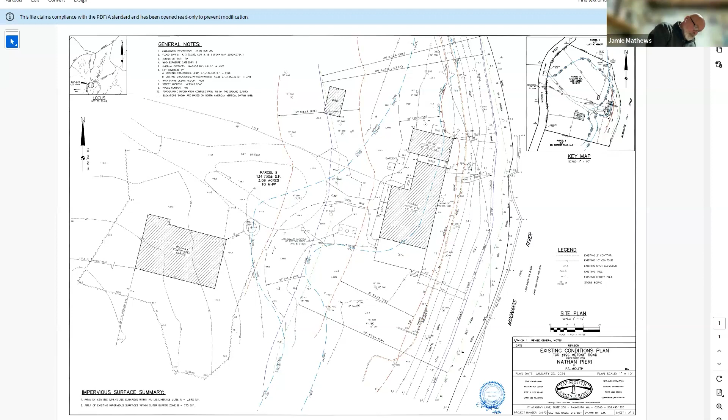Yes, sir. Before I start my presentation, I want to fess up to something. I was unable to get to the site to place a sign to help you find the site. I'm hoping you were able to find it. There was a street address at the driveway entrance and the name, and the last week got away from me and I never got out there to place a sign. Make a motion to deny. I'm kidding. We thank you. Forgive you this time, Mike. All right, thanks.

I'm sharing with you the existing conditions plan of the site. The property has water frontage on Moonakis River. The wetland resources of note include land containing shellfish, land under the ocean. There is a narrow band of salt marsh. There's a sloping landform that meets the definition of coastal bank. I've also highlighted spring tide and noted that as land subject to tidal action because it has associated with it a 100-foot no disturbance zone A. More on that in a minute. There's also an area of critical environmental concern that's flood zone elevation based, and it's elevation 10 on the maps in this location.

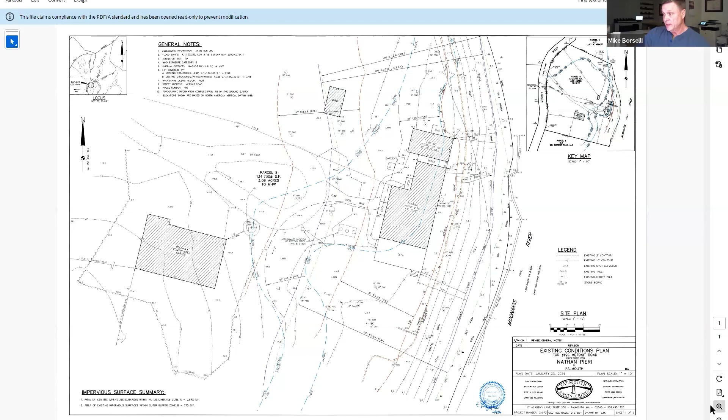The lot is fairly large in size. I'm going to zoom in on this map. The lot itself is 3 acres in size. It's heavily wooded with the exception of the driveway and portions of the site that have been previously developed. On the lot today, you would have seen an existing house. As you approach the house on the right, you would have found a recently constructed detached garage, which is outside your jurisdiction. And there's a shed also on the property. It has a teardrop driveway and some lawn areas.

The plan is to demolish portions of the house and renovate other portions of the house. In the staff report, the term raze, R-A-Z-E, is used, but this isn't a complete demolition. This is a partial demolition because some portions of the house are very old and special, and the client wants to keep those portions and demolish some of the newer sections, which were constructed in, I think, the late 90s.

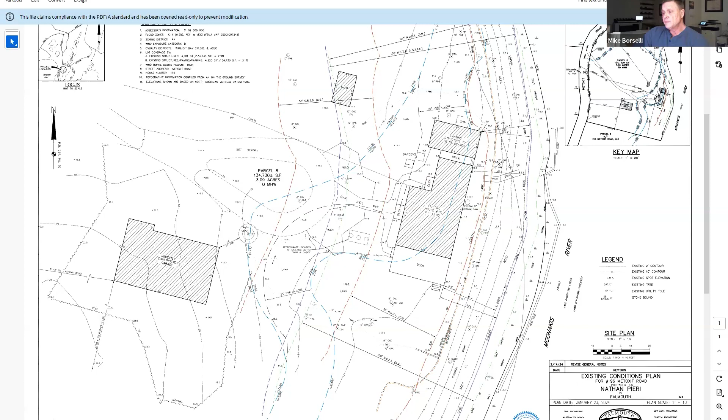I'm going to show you an exhibit that I can't take credit for. Mr. Pieri did this exhibit, and it outlines what I mean by not a full raze and reconstruct.

As this project progresses, the idea is to demolish 2 sections, shown in red boxes. That is the existing deck in this section of the house from 1999, which is going to be demolished.

This middle section in green is the original house, and that is going to be preserved, but it's going to be put on a new FEMA compliant foundation. And this section here is also going to be preserved.

But this section is going to be moved. It's going to be moved from this position over into a location here, which shows on my site plan, which I'll show you in a minute.

In order to put the new foundation on this project, that section is going to be moved. This will be demolished, and this will be demolished as step 1. Step 2 involves, after that section's moved, shifting the box over that they intend to preserve temporarily.

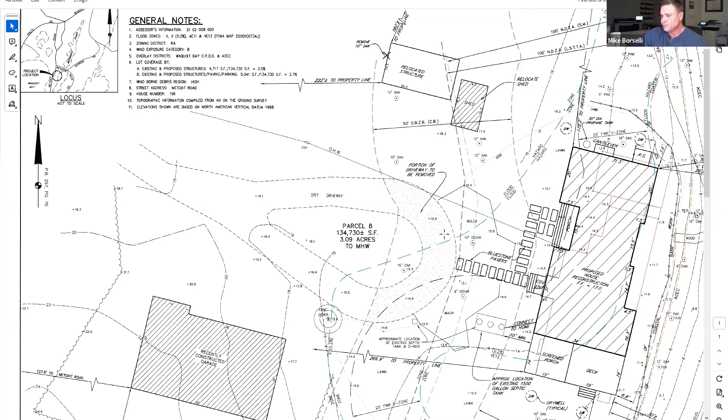That brings me to now my overall proposed site plan. This shows the section of the house, shown in red here, to be moved over to this location. That'll make way for all of the other steps I just outlined.

So the net result in the end is a new footprint that is made up of a portion of the existing house, which is here, with a small new bump out on it, and then new construction to the north of that.

As I typically do, I show in red for reference the existing structure. And I'm pointing out now how the new structure will be shifted back somewhat from the leading edge of the existing house in this area.

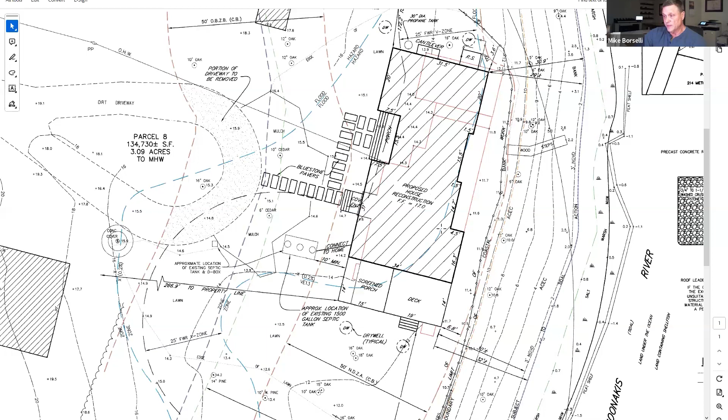This one little jut out is proposed to maintain the same distance from the wetland resources, as well as the new deck on this edge. And there's a very specific reason for that, and that is it captures a very good view down the Moonakis River in this position.

Mr. Pieri thought this out in great detail and worked out the details with his architect.

Jen had mentioned concerns about this being so close to the top of the coastal bank and the fact that it's in a velocity zone. And we had early conversations with Mr. Pieri about that, but he understands the risk, but the reward of the position on the site and the view is worth it to him.

And this does meet your performance standards. There's some staff comments in the staff report about recommendations and such about this.

As I also do typically, I did an impervious surface analysis of the existing conditions, the blue A zone areas and the orange colored B zone areas for the existing condition. And those are tabulated on the plan.

I also did an analysis for the proposed condition, which includes shifting this shed over here, shifting that portion of the building back, and then reconstruction and renovation of the balance of this and some walkways. A big section of the driveway is proposed to be removed.

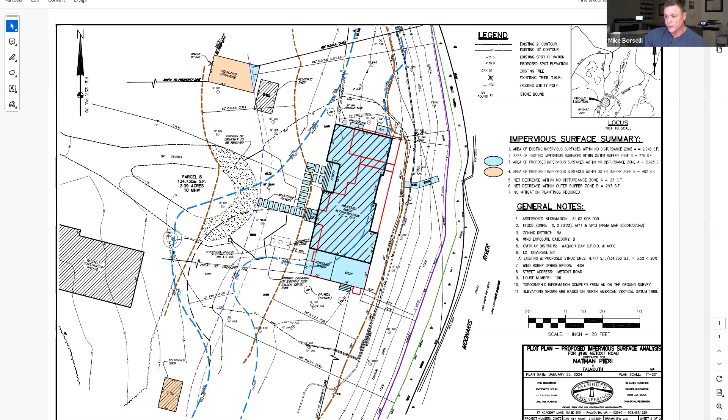There's an existing septic system that serves the property that is in good working order and past Title V. There's no plans at this point to do anything with the septic system.

Dry wells are proposed, and as I had stated, this structure currently is not in compliance with FEMA standards for construction in a velocity zone. So a new concrete pier pile supported structure is proposed to make it in compliance with both FEMA standards, Falmouth Building Department standards, and your standards.

I reviewed the staff report, and Alyssa and I didn't get a chance to go through it in detail, but I understand all of the issues and comments. There's nothing really, I don't think, earth-shattering in the staff report that we can't address.

There was a question: is there an enclosed space proposed below the house? Meaning, I believe, underneath the building, and the answer to that is no.

It's proposed to be completely pile supported and open. There might have been an architectural rendition that showed something, but it's absolutely not intended. We understand we can't enclose that. And it's very low profile.

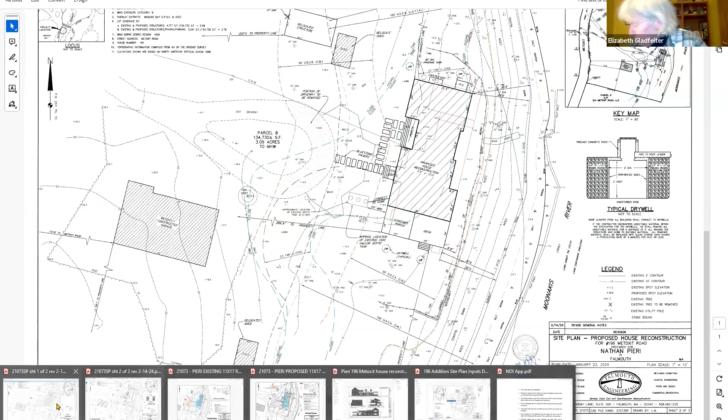The proposed first floor is 17 for the new house, which meets your standards for work in a velocity zone. And the existing first floor is currently just under 16. So they're only lifting the house up about a foot, but it's currently not open pile supported. So that's the big difference.

Other comments in the staff report say please submit revised architecturals that eliminate any breakaway panels. We absolutely intend to do that.

There was a comment about, given the current distance from the top of the bank and the presence of land subject to tidal action, staff strongly encourages the applicant to consider moving the house landward. I touched on that and explained the reasons why. We are moving back a section, but there's a section that isn't moving back, and it's not a huge shift back, but it is something.

There are a few other comments related to some trees that may not have been shown on the plan in specific areas. For instance, we were proposing to reshift this structure. I'm happy to revisit and look more closely for other trees that I may have missed.

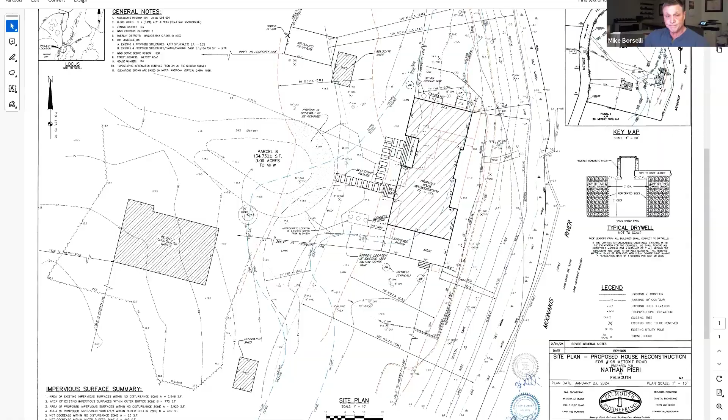Thank you, Mr. Chairman. First off, we can't comment on the first part of Mike's presentation about the demolition, because we were not provided that information. It wasn't in the narrative. We were not presented with that schematic, so we have no comments at this time. Mike, if you'd please submit that to us so we can review it, that would be great.

Yep. It's pile supported, Mike. You kept saying FEMA compliant foundation, but there is no foundation, correct? It's on piles. Yeah, I mean the pilings of the foundation.

Okay, yes. All right, and you said that you were moving a section back, but you're actually enlarging the structure into that section, so there really isn't a section moving back. You're moving an older portion of the section back, and then you're building onto the other section, correct? So there's really no section that's actually pulled back, you're putting a section back almost in the exact same footprint, correct?

As far as size goes, yes, but my point was there were concerns about it being so close to the top of the bank, so I was trying to illustrate that yes, it's getting rebuilt, but it's getting rebuilt in a place that's a little bit further away from the top of the bank. Well, your existing conditions plan and your actual proposed plan, the deck and the other portion near the deck are the same location relative to the coastal bank, and if you're talking about the section, you're moving it a whole 4 feet back.

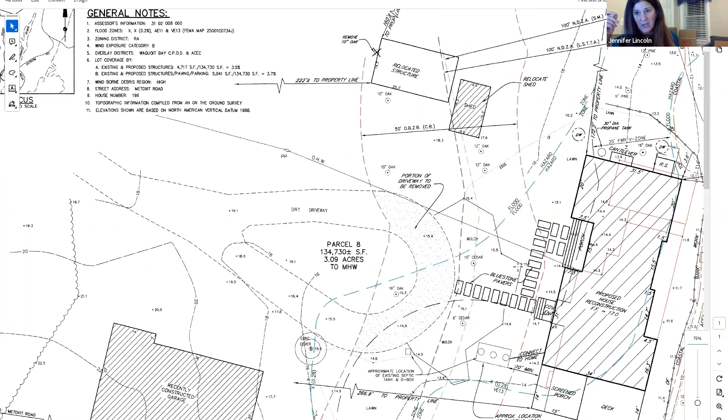Well, so I really do have some concerns, Mr. Chairman, with the location of this house. I mean, it is 6.8 feet away from the top of that bank. We have banks all over town that are eroding at a very rapid rate. This is a 3-acre property and there is room to pull that house back, which I believe would not significantly impact the view.

Your client is aware that at no point in the future will we allow this bank to be armored, and that he may be faced with moving the house landward at that time. He understands the comments in the staff report about that, yep.

Again, I have really grave concerns of building a house this close to a bank in a velocity zone. I just think it's very, very concerning.

And then Mike, there's just several trees that aren't on the plan, but you said we'll have a site visit and talk about that. Yeah, I think it's best to handle that on a site visit. Okay, we can figure that out.

And then you said the shed location's not set in stone yet, but we're gonna have to have it set in stone in order to approve it. Yeah, so the point is, we're gonna show you a place where we want to move it if we have a site visit that's not gonna result in any clearing or tree removal.

Okay, I mean, the shed is sort of being moved because it's gonna be nearby to the other relocated portion of the building, and they wanna coexist. It's a good shed, but there's no need to clear. Yeah, no, we just need to know where it is out in the field so we can look at it, that's all.

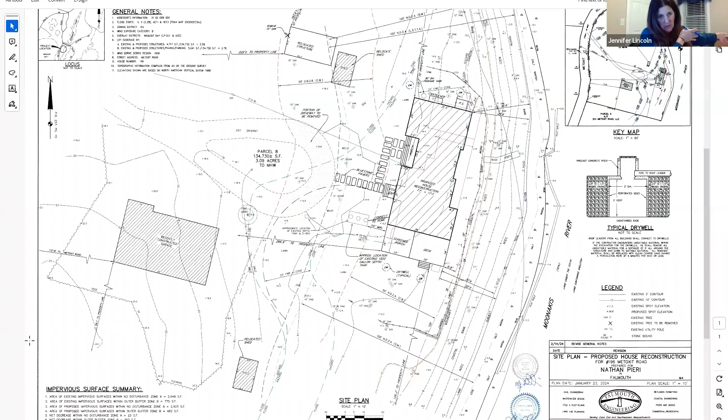Mike, going back to your first schematic about when you're moving the house, like how you're breaking the house apart - you're removing a section of the house. So the main portion of the house, you have to move that completely off the existing foundation in order to remove the existing foundation and drive the pilings, correct?

Correct. Okay, so the comment that Mr. Pieri made about the flow of the house - the whole structure could move back and the flow could be maintained because you're just piecing it back together. So if you moved it back and then moved the new section even further back to match the old section, it doesn't really have anything to do with the flow, because you have to move that old section way off the foundation to put the pilings in. Correct? So the flow comment is kind of confusing to me, because you can make the flow work wherever you site this house on the property. It doesn't need to be sited where it's proposed, is what I'm getting at.

Okay, well that's all I had, Mr. Chairman.

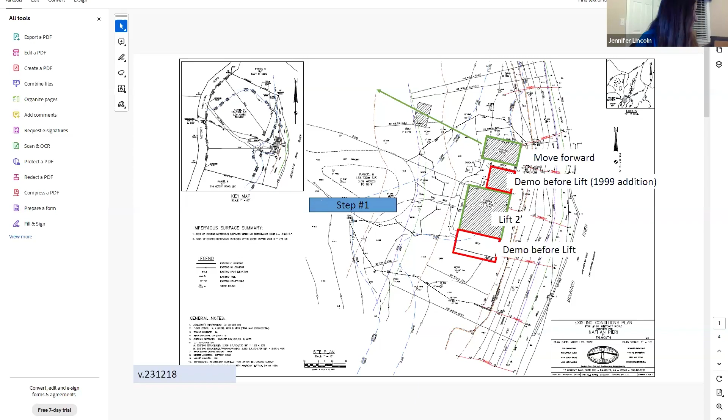Well, maybe he means that the flow, including the views and whatnot - the corridor. As far as moving part of the building and putting it back, that's kind of irrelevant. I mean, if they tear the house down and start all over, it's the same methodology. So the fact that they're going to take a piece and put it back - they're cribbing it up and moving it, preserving it. What I mean is, I think what you're asking, that's kind of irrelevant. Whether they're going to put the piece back or build something new, you know what I mean?

No, I don't think it's irrelevant, because the statement was that they had to put this here because it matched the flow - the flow that gives you the view, Jen. Oh, the flow - I thought he meant the flow through the house. I thought he said the flow through the house. No, no.

All right, any other questions or comments from the board? Staff? Mr. Borselli? Yes, Mr. Chairman, I'd like to request a continuance to March 27th.

So Mike, did you say the 27th? Perfect, thank you. Are we all going to be here on the 27th? That's a good question. Kevin, will you be here? Actually, now that I think of it, no, I don't come back until April 2nd. So maybe we should set a date. Mike, we'll have to do it sometime in April then if we're not going to have a quorum.

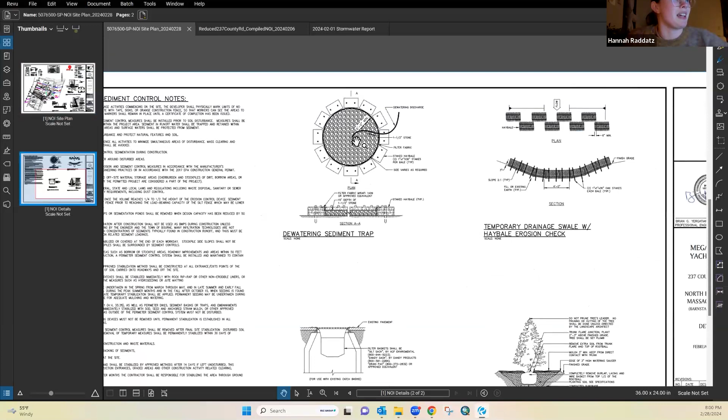Some details that might be helpful. On the second page, which is part of the new revised plans, we included a detail for a dewatering sediment trap. This would be if any dewatering is necessary for any excavation portion of the project. This would likely be located on the eastern portion of the site near where the proposed rain garden will be.

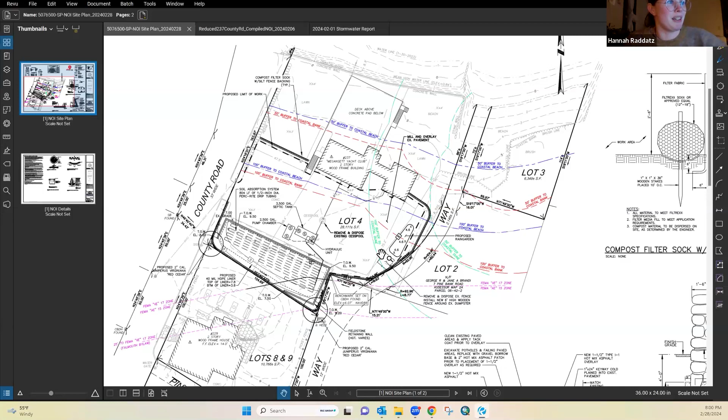This is just due to constraints on the site and so much parking area already being paved, so it would likely be in this area here. But we believe that with the filter fabric and the use of staked hay bales and a filter bag as well, this shouldn't cause any sediment to leave the enclosure of the dewatering basin, and it would be cleaned up as soon as it wasn't needed anymore.

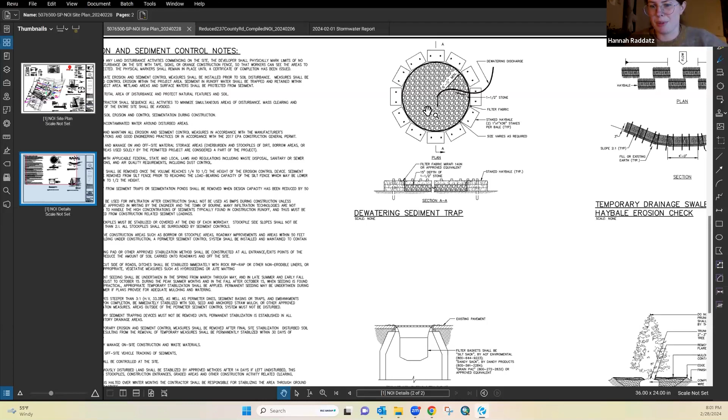I believe that is all of the important information, so I'll go ahead and turn it over to the Conservation Commission.

Should I leave the plan up or should I just stop screen sharing? Stop sharing for the moment, but don't be upset if you're asked to share it again.

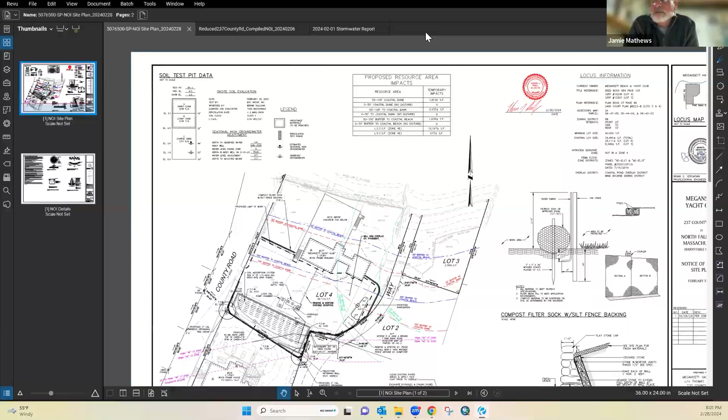All right, Jen. I'm sorry, Hannah, if you touched on it, but I think all the variances are very technical in nature. They have to do with shear walls and a V zone that they need to enclose the mounded septic system, Mr. Chairman. So the variances are just very nuanced, but BSC felt very strongly about putting them in just because they didn't want to get tripped up.

Yeah, you're right, Jennifer. I didn't bring them up in my discussion. We just wanted to cover all your bases, and speak to the fact that the regulations don't typically allow for this, but given the site constraints, I understand it's sort of we didn't have a choice, but we wanted to acknowledge the fact that we were trying to do our best to be in compliance with both the state and the municipal regulations. Yeah, so we had reached out and had that conversation with BSC Group.

At this time, the staff has no problems recommending the requested variances for this project.

Hannah, the rain garden, are you putting that in the area of that existing Rugosa Rose? There's a narrow bit of sparse grassy area at the edge of the parking lot, and then a very dense hedge of mostly Rugosa Rose. The plan would be to cut into that, though I don't have the exact square footage of how much would be cut into, since I don't think we captured that properly on the plan.

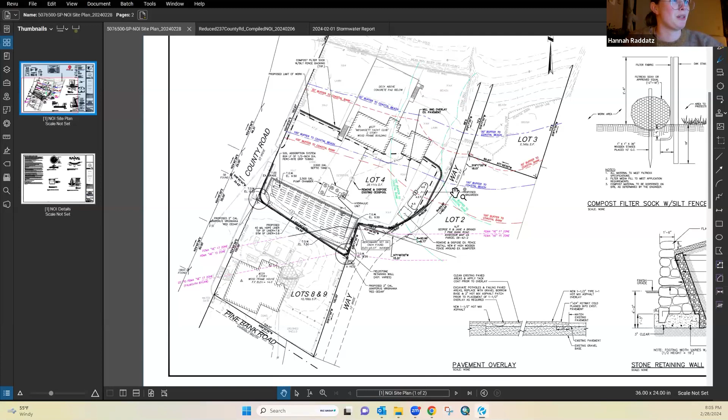I don't think it has a name per se - it's a 12-foot wide way that provides access to the water. Pine Bank Road, it's a paper way. Pine Bank is down there, further down - I'm not seeing it. Yeah, so Pine Bank Road is here on this southern edge, and then there's a way that's 12 foot wide.

But do people use that to access their homes, correct? Jennifer - I'm Tom Fanning, by the way, I know I'm supposed to introduce myself. I'm just a volunteer member of the club that works in the industry.

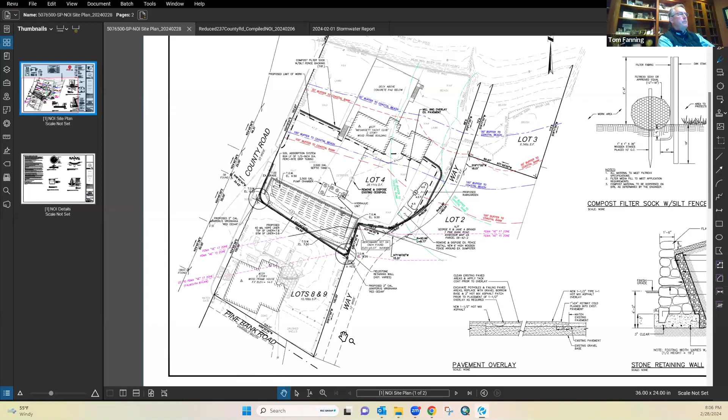Pine Bank is an active dirt road, and folks do use it - the paper way does not exist. Okay, that's all I need to hear, Mr. Fanning, thank you. No problem, it's just a paper road, that's fine. Okay, I'm all set, Hannah, you can remove the plan. Thank you, those are the only questions I have.

All right, Ms. Bergeron. Thank you. Hannah, I know you had emailed this to me before, but if we can just add it to the record - who will be maintaining the IA system when the club is not in use, and I'm assuming during the winter season?

Do you have any detail on that? We do - we're going to hire someone. The legacy cesspool, which operates like a lot of the cesspools on the Cape, not particularly well, has no maintenance contract, but we have no problem accepting a condition from the commission that obligates us to have a reasonable maintenance solution. I don't have a name for you specifically tonight, but I'm happy to accept an obligation.

Okay, thank you. Just to note, there is a fence around the dumpster in the velocity zone - I understand it's there for screening, so the commission will have to decide if that can be permitted. And I think you touched on it at the beginning, Hannah, but I missed it - do you have a location for the two replacement trees yet, or is that to be worked out later? I think I just had a discussion with the applicant, Tom, just before the hearing.

There's some concern that the neighbors might have buy-in to the location of where they might be positioned. That's TBD for now, but we can always condition that if the board feels it's appropriate.

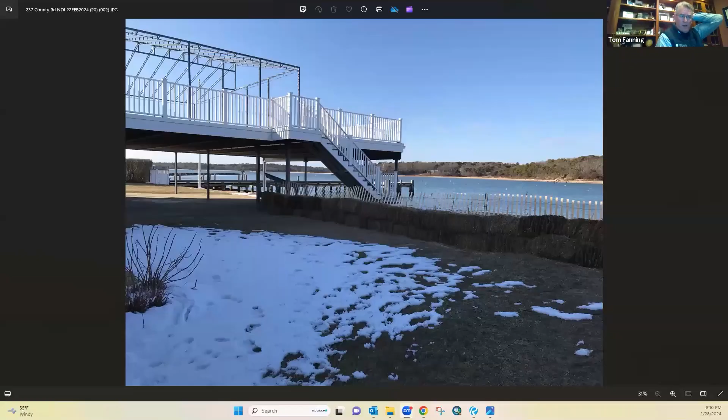I don't know if they were on the wall, but I'm presuming it's in an effort to prevent storm damage. I do know we end up replenishing sand periodically - maybe that's in reaction to this, but I'm embarrassed to say I haven't been down to the neighborhood this winter much. I was not aware those are there. If they represent a problem for the commission, I'm more than happy to accept a condition to have them removed immediately - that's not a problem.

Yeah, we usually go through a permitting process for that type of thing, so if they can be removed that would be great. And next time you add sand, that gets permitted too. I was just going to say, Mr. Fanning, what is this sand replenishing program of yours? That's not actually mine, but I hear your point - we do lose sand periodically there, and that's fine, but you are not allowed to replenish it without a permit, so you will need to file a notice of intent to replace the sand. Understood, no problem.

You guys good? Yeah, if I can get over the sand replenishing with no permit comment, I'm good.

All right, commissioner comments, I'm going to start. So I assume those hay bales were just for storm damage prevention over the winter, so I don't see the point of asking them to remove them. So that's one comment.

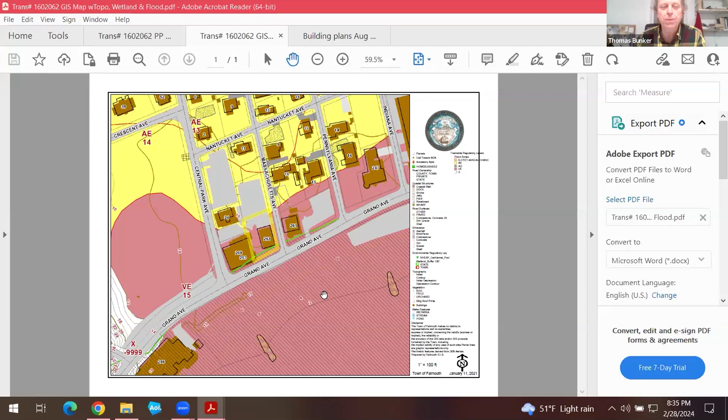We have the GIS map here, showing that purple is a velocity zone. And here is our plan. So you're zooming into here.

That's the corner talking about there. 33 square feet to be enclosed in this location, which will be like one more table inside rather than the concrete stoop on the outside. And then this much 30 feet of it's basically a canopy, but it does have walls and windows.

I think they're somewhat slidable, they're operable. There's still access from both sides. There's a ramp coming up from the north side, and then a little bit steeper access coming up this way to the doorway that's right in here. So nothing on the ground is changing. There's no excavation, just holes drilled into the concrete to anchor the framing down.

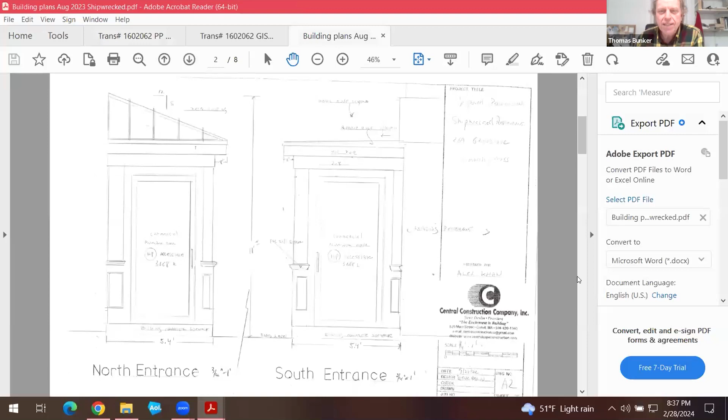I have some architectural files that we sent to you, but somehow I couldn't find them, and the ones that I have are not so good. But anyway, it's going to be like this kind of view here, looking at it from the ballpark side. Some windows along here and a roof over it. These are some other details here, but if you get the gist of it, it's covered there.

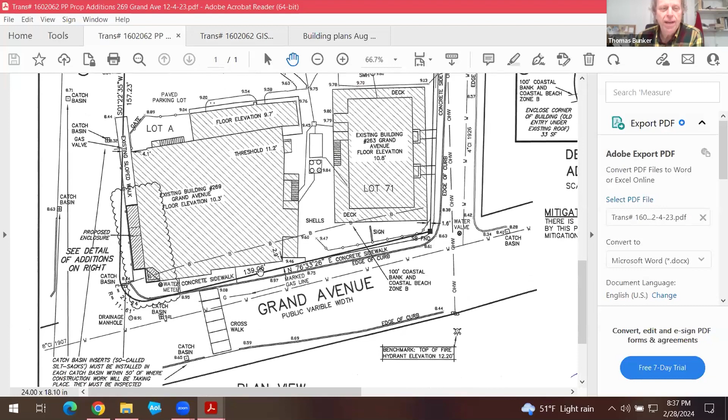It's all asphalt and concrete to begin with. There's no change in coverage, and we're within flood zone VE, the velocity zone. I'd have to go back to this one again - 195 square feet of enclosure. They had proposed a much longer one, which went way over the 200 square feet, but that's down to less than 200 square feet.

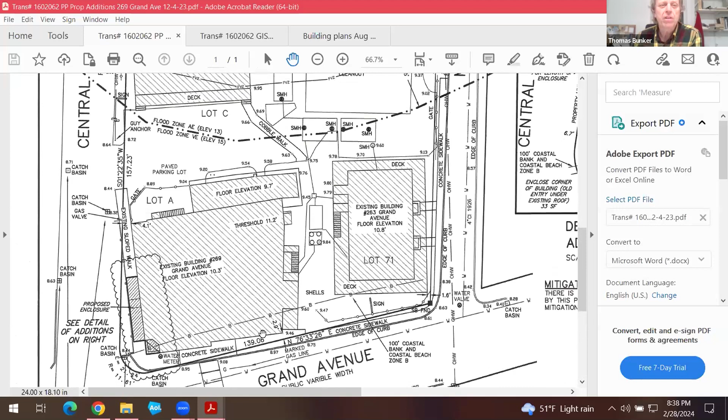And other than the velocity zone, we're not in any other resources or buffer to resource areas. So that's what we're proposing, and I'll take that down and take any questions.

Thanks, Tom. Jen? I have no questions at this time, Mr. Chairman. Ms. Bergeron? No comments. Commissioner comments, Maury? The only thing is they've taken their last and only bite of the 200 square feet, well, 195. Make sure that's in the finding, so there's no future improvement.

All right, Betsy? Those are glass windows - they may be broken by baseballs. They're tempered glass. I should have - oh, pointed. Okay, yeah, they thought of that. That's from long ago, but experience.

That's all, thanks. Kevin? No questions, Mr. Chairman. Jen, is there anything in the public chat function, please? Nothing in the public chat, Mr. Chairman. I'm gonna make a motion to close the hearing and take it under advisement.

Harlow Hawk, second. Kind of simple, we have a motion and a second to close the hearing. Any other questions or comments? Great, all right, presentation from Tom. Short and sweet. Okay, yeah, good, you like it? I'll try the next one.

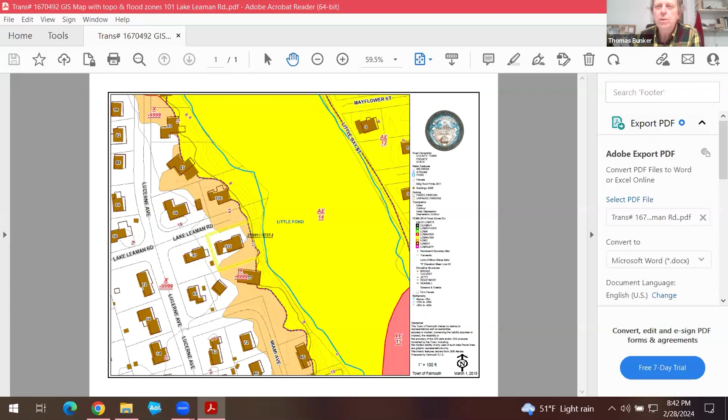So you see it's flood zone AE elevation 14, fronting Little Pond at the end of Lake Leaman Road before it topples into the ocean. And this sort of has to do - not has to do, but it's sort of a continuation of your conversation with Mike about eroding coastal banks.

See if this is the right plan. There we go.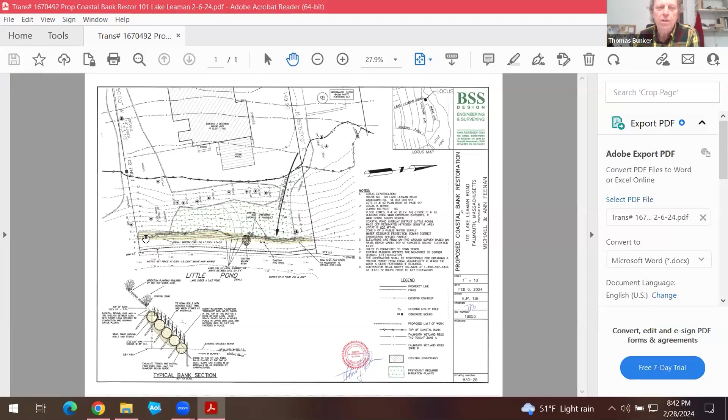So even when we filed the previous notice of intent, when we did some additions to the backside of this house, there was some small amount of erosion along the base of this bank, which goes up from sea level to elevation 14, 15, fairly steep. It's lawn right now with a row of pruned back cedar trees across the top, and this has eroded more severely in the last few years when he was doing the work, so he stopped.

He knew that he wanted to do something, and I think he had talked to the conservation department. They said he could put in these coir rolls to slow down the erosion, the soft solution, however it might be termed. And so that's what we're here before you with.

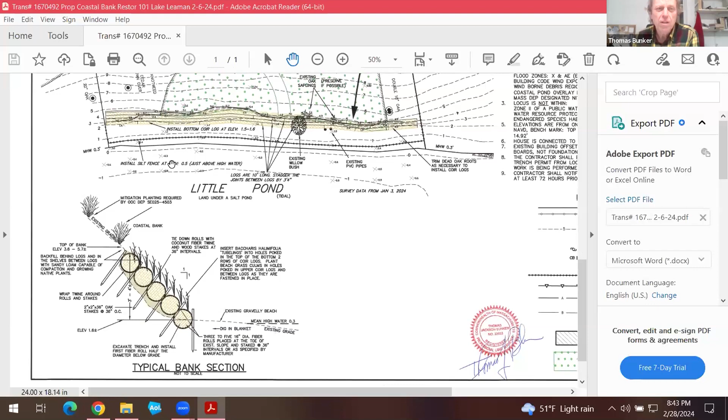So it's in a flood zone, AE elevation 14, so it's a flood zone all the way up. This bank has eroded now, so the base of the bank is at elevation 1.4. It varies because chunks of it have been falling down, but it's around 1.3, 1.4, whatever. And of course the top varies from 3.6 up to 5.7. It goes up and down like that.

And so this is the mitigation planting that was proposed and approved at that time. And it's hanging over the bank. See, some of these green dots are beyond the top of the bank.

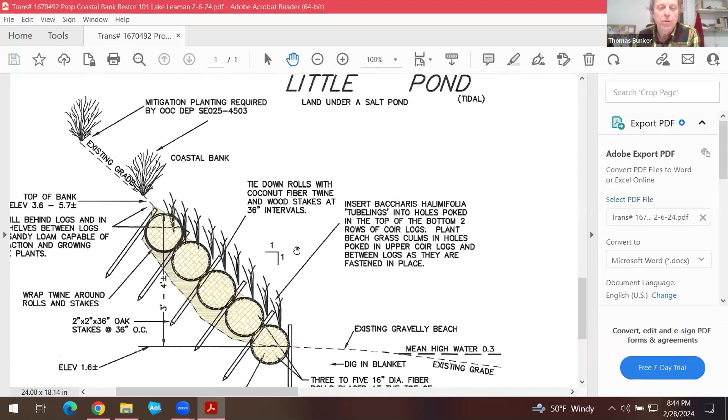So what we're proposing is the 16-inch diameter coconut fiber rolls staked in place up the bank, basically a 1-to-1 slope up here. A lot of times this system is put in along more beach type or sandy areas, and that's why there was left one little bit of planting beach grass here.

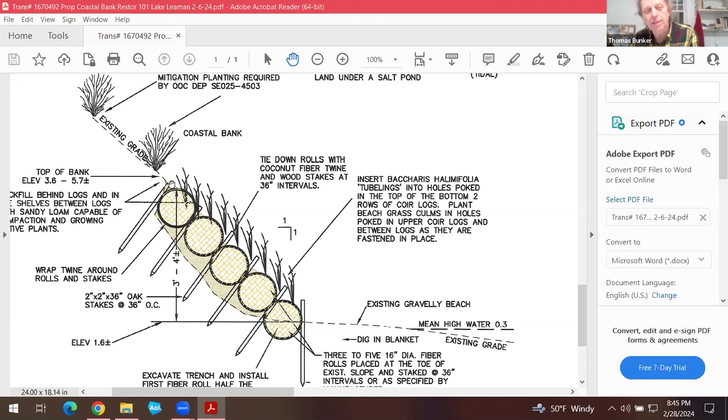But the proposal, or the narrative rather, says more because of the environment. It is brackish, it's a coastal pond. It's saline, but not as saline as the ocean, and certainly the soil conditions here are not sandy. So rather than filling this all up with sand and beach grass, sandy loam would be put in, which would be more conducive to more upland plants taking root in it.

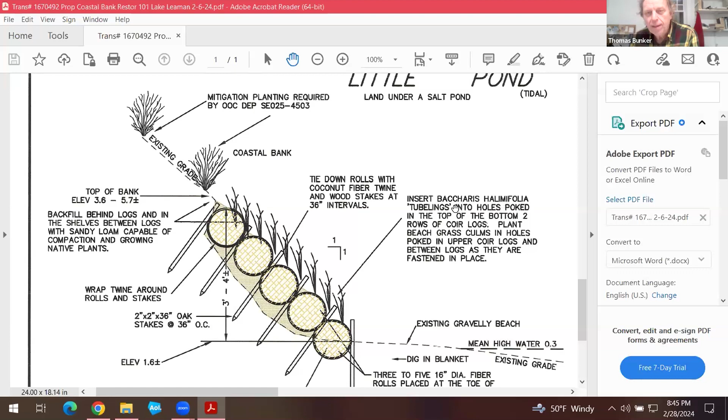So what I had was I do have Baccharis halimifolia tubelings, which I discovered from a native plant online nursery, to plug into the coir logs, like the bottom two rows of that, to get some of that more salt marshy type vegetation going along the bottom.

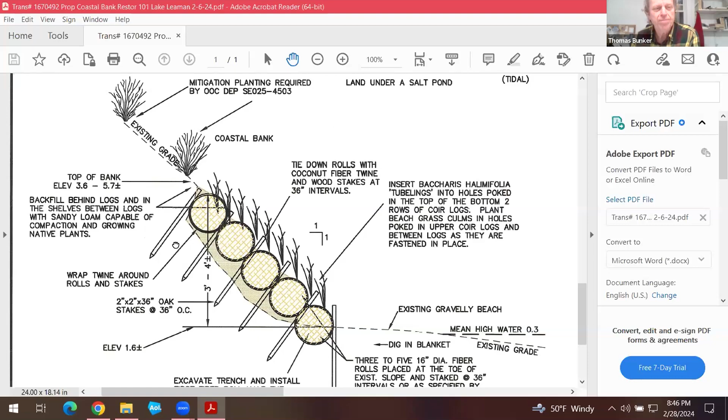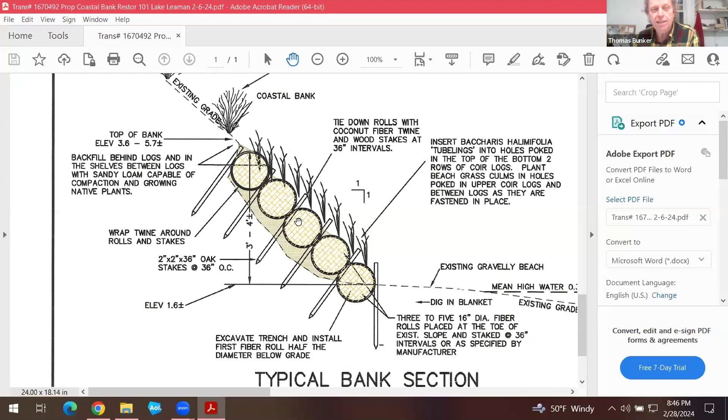But then felt that the upper part could just be put in with what I had called in the narrative, at least, the native grasses. Staff asked me for some clarification on that, and so I was suggesting what people would call drought tolerant, deep rooted grasses like fescues, that would grow into this matrix, the substrate, and hold it together better. And so that's what we're proposing to do there.

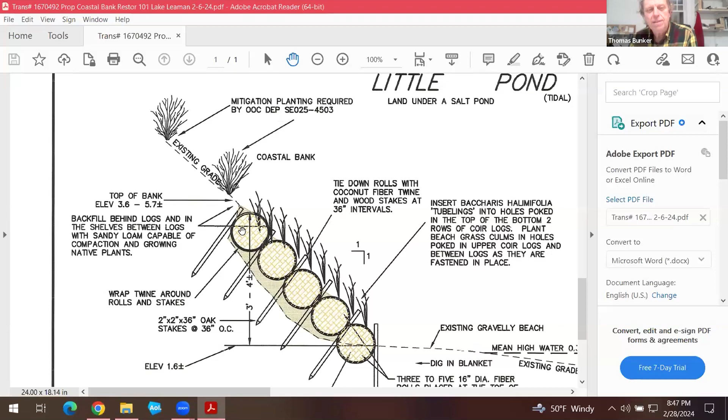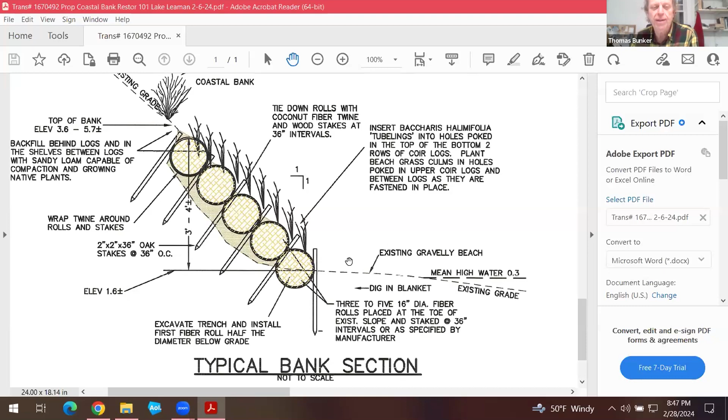The limit of work we have staked, till I went out to look at it with this wind blown water, the water was lapping up a little higher than the stakes we put for the limit of work out there. But I think on normal times, I think we're okay with it. And so it is not below high water, it's above high water, so it probably doesn't require licensing anyway.

I can review some of my response to the staff. I tried emailing it earlier this evening, and for some reason it didn't go through. So Jen, I don't know if you and Alyssa got the email. I tried again.

They asked if the ivy - see there's knotweed and ivy up here, the ivy is still quite plentiful, and there's still knotweed there - and I could see no indication that they'd started doing the mitigation planting, so they didn't prep the rest of the site for it. So I'd say none of the work down on the bank was ever started. And you know, when this work is done, then they will do the planting, including the ivy and knotweed.

We commented that we don't have a plant list from the first time, and we still don't have a plant list here. It would certainly be fine if we just put in the condition that the plant list would have to be approved by you before it's installed. Obviously, it's native species, and you have to get some that can take a little bit of salt spray, so not the usual viburnums.

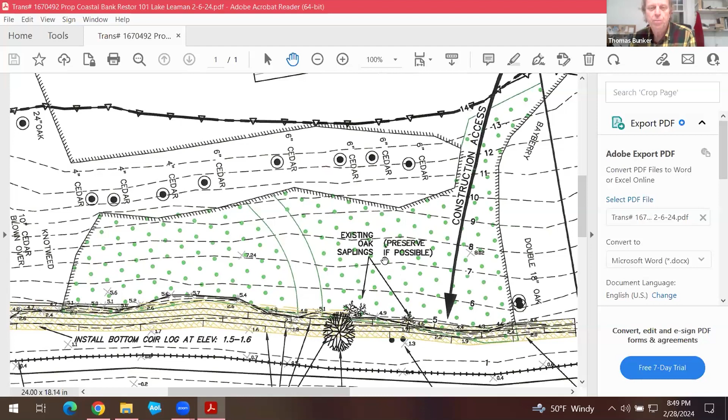There are some saplings here, and preserve them as possible. If they can't be preserved, staff asked if a condition could be added that oak saplings be planted back in if these existing ones can't be preserved, and that's certainly a valid condition to put on it.

The contractor she asked about is Traverse Landscape Construction from Sagamore Beach. Mike - got it here.

Mike Fraser at Traverse Construction.

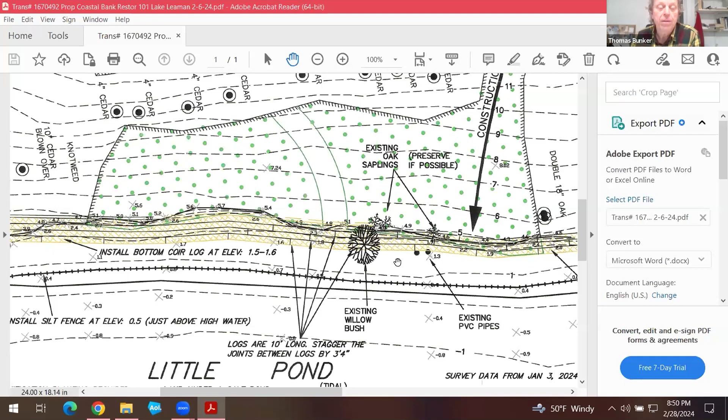If you're writing it down, Jen, you should be able to get the email when you get back. Anyway, it's in there. The last question was about those PVC pipes. Mr. Feenan said these are two existing pipes put in by a WHOI scientist who comes there and monitors something two or three times a year. So that's what those two pipes are for. That is what we are proposing, and I'll take this down and take questions.

Thanks, Tom. Jen? Yes, Tom, do you think you might be able to put a plant list together for us? We can close the hearing, but if you could get me a plant list by the time we issue the order, or before, we can incorporate it. I'd feel a lot better if we actually had a plant list, given that this should have been done before. It hasn't been done. Their project was done, but none of the mitigation was done.

Definitely, it's not giving me the warm fuzzies, Tom. And I like to be warm and fuzzy. We like when you are.

Really? It's a pretty steep construction, never overseen it there. What's that? Do you know, who'd you say it was, Traverse Construction? Do you know if they have any experience installing fiber roll coir logs like this?

He says he's done many fiber roll installations, probably not in Falmouth if you don't know him, but he says he's done many. Okay, didn't say we didn't know him. I'm just saying I don't know if he did any coir fiber roll installations. He said he has. Okay.

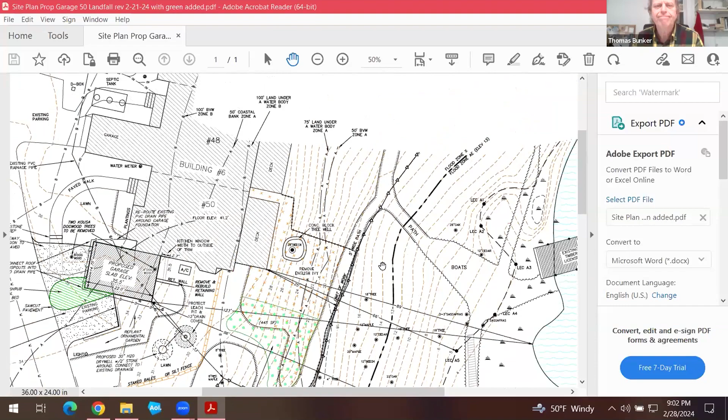To address that, I met with staff on the site. There'll be some mechanical scraping of the ivy through here, but up in this area, certainly nothing within 10 feet except pulling or cutting the ivy stems off the tree by hand. So there's no mechanical work in this area, and I've paraphrased that on the plan here.

I thought I wrote that down. I know I did, it's down there - only hand pulling. There is also no herbicide spraying because treetops does not allow herbicide. So it's just maintaining this ivy by hand, keeping it out of this area, and trying to maintain a cover of grass over it, as best can be done.

This area of mitigation got expanded into here, so now this walkway through here is 4 feet wide - it used to be 6 feet wide, so this area got expanded. The amount of pavement got reduced.

So there's some in the B zone, but the plans that you have do not show this highlighted. I can send you another copy with this - I added this green just this evening so you could see better. This is the shrub

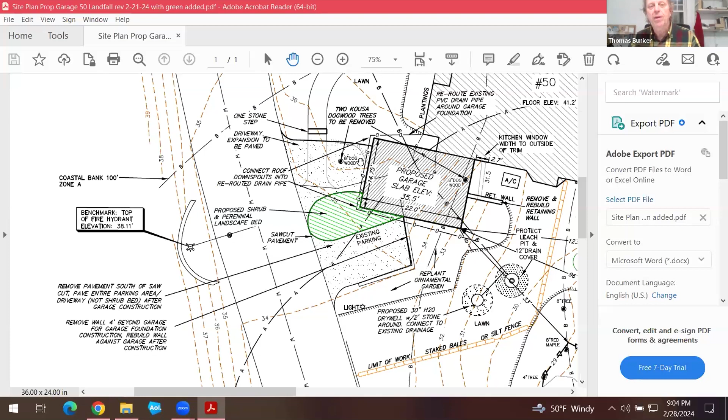and perennial landscape bed in this location here, not paved. This was all paved beforehand, and the pavement went a little further up. So pavement was reduced - that's reflected in the mitigation calculations, and there are

5 viburnum. The association planted these 5 viburnum on this hill. What did he call them? I think Brian Casey, who was doing the work - he does the work for treetops, and he'll be doing this work for the Assads.

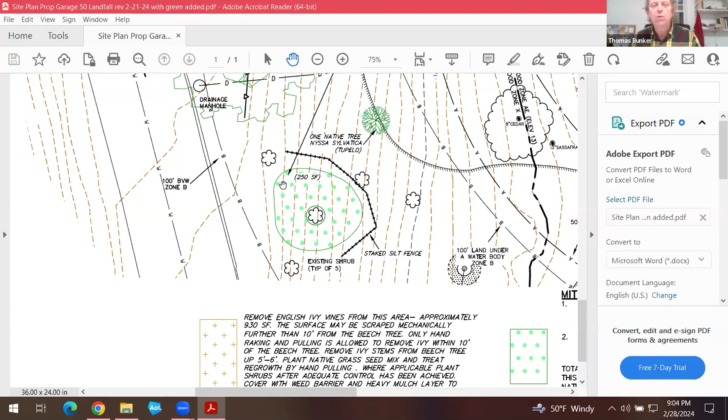It's a type of non-native viburnum that was planted there by the association, but they will plant this 250 square feet of native shrubs within that area, unless the association says to move it to somewhere else. But there will be 250 square feet. It'll be 693 square feet total, plus a native tree right on the edge of the lawn down here.

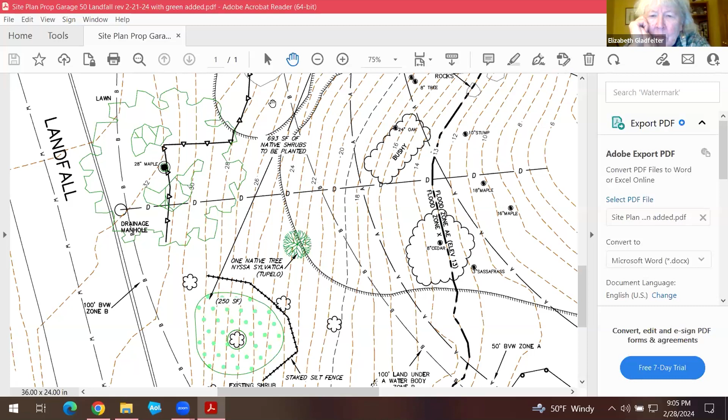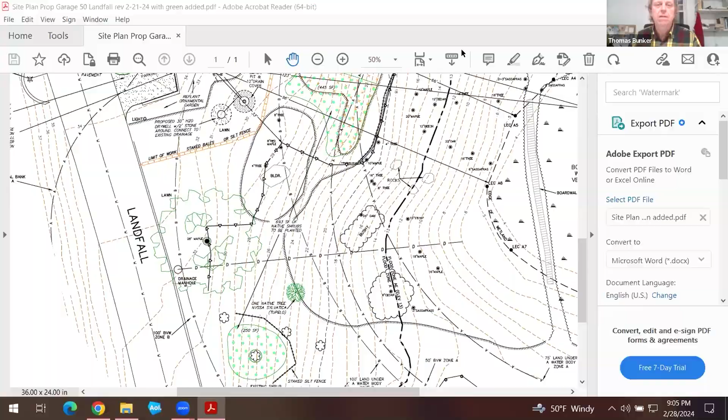So that's what we're proposing to do, and we will get that letter. I hope they can at least - I hope the hearing is closable, so he'll know that it's moving forward on this front anyway.

Thank you, sir. Jen?

I don't have a problem with the proposed project. I do have some concerns about the association's understanding of what the requirements were. There was a board member there, Vicky Lowell from the Board of Directors of Treetops, on site with us when we met. Tom, is there a reason we haven't gotten the letter yet?

Lawyers and people take time. As far as I know, what I've heard, they're amenable to it. His lawyer is talking to their lawyer and things like that. Yeah, and again, this is common land. I don't want to hold up the project, but I'm really uncomfortable issuing an order - even with a condition that we don't sign the building permit without this letter.

I'm uncomfortable, but if the board will allow you to do it, that's fine. I'm still uncomfortable - if that's a condition of approval, if that's a condition of signing for the building permit, if you won't sign it unless that comes through, I think you shouldn't have to feel uncomfortable that way.

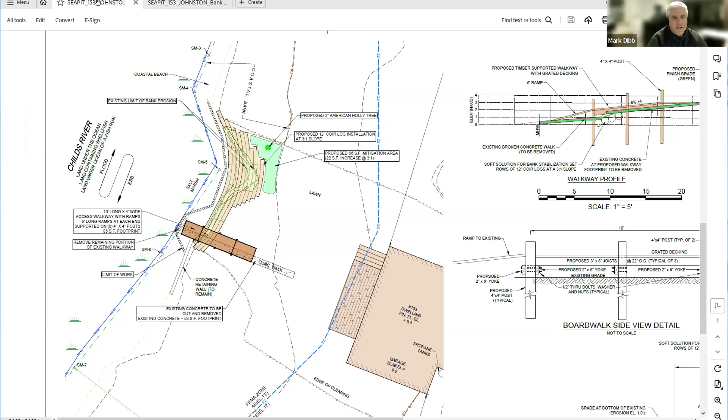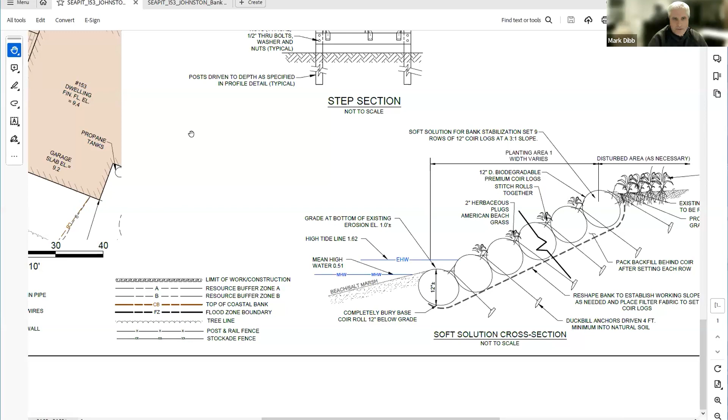Basically we took the questions and concerns and it resulted in a design change. This was the original submitted plan. What we did was -- let me go back -- the coir log installation is the same. There's an area of erosion through this piece of bank, varying from about a foot to 2 feet high. So it's not a very significant erosion, but we are proposing a coir log installation to fix that. And then the second part was to maintain some access down to the water that they've had for many years.

And what we decided was a series of basically just 4 steps. They'd have a typical rise of about 7 or 8 inches, and a run of about 2 feet. So it's 4 2-foot long steps, a total of 8 feet, something that would be comfortable for them to get down, over that coir log installation, it's a change of grade of about 2 feet again. And we're even proposing that these be made out of like through flow or graded decking.

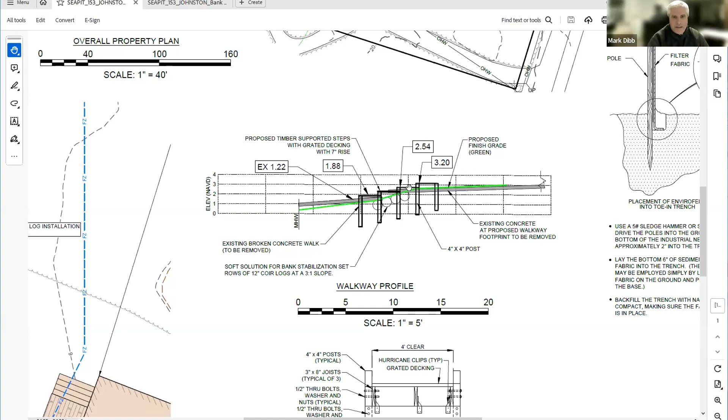The concrete will be removed. It's a net reduction of area. The existing concrete's about 63 square foot footprint. These new 4 steps that would allow the access would be 33 square feet. We feel it meets the applicant's needs and desires to just be able to maintain access down there, and is a reduction in area, is providing the through flow decking. It is close to the ground, but again, it's just a set of 4 stairs to allow them to safely get down that slope.

We did remove the mitigation from the plan, as we're now reducing the footprint by almost a half. That is the current proposal, and I'd be happy to answer any questions. Stop sharing here.

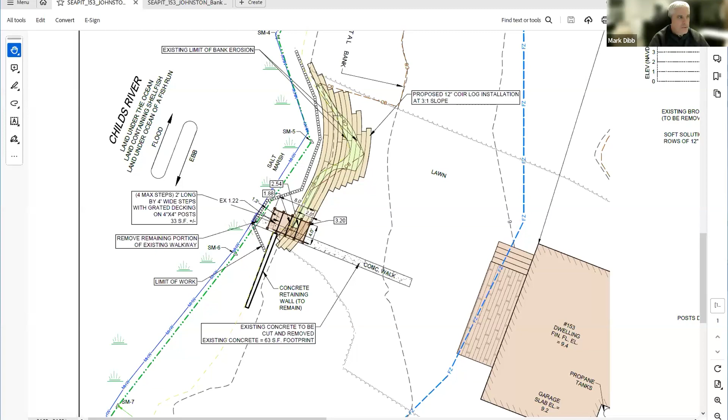Thanks, Mark. Jen? Thank you, Mark. I like the plan change, so thank you for that. Just one quick thing, and I don't know if we touched base on this at the last couple of hearings.

Who's doing the coir log installation? We don't have a contractor picked. My preference would be like a CLM, Crawford Land Management, or Wilkinson, but there is not a contractor yet, so we would be amenable to a pre-construction meeting and all that stuff. All right, great, thank you.

That's all I have, Bergeron? Mr. Chair. No comments, thank you. All right.

Commissioner comments. I'll start. Mark, you just said it, but I'm just going to reiterate the pre-construction meeting and methodology, just to be clear. Once we pick a contractor, we can do both. We'll get you the methodology and set up a meeting. Excellent, just want to make sure I was clear on that.

All right, Kevin. No questions, Mr. Chairman. All right, Maury. No questions. Thank you. All right, Betsy. Mark, I think this is a great solution. Thank you.

All right, Jen, is there anything in the public chat function, please? Nothing in the public chat, Mr. Chairman. Thank you. I'll make a motion to close the hearing and take it under advisement.